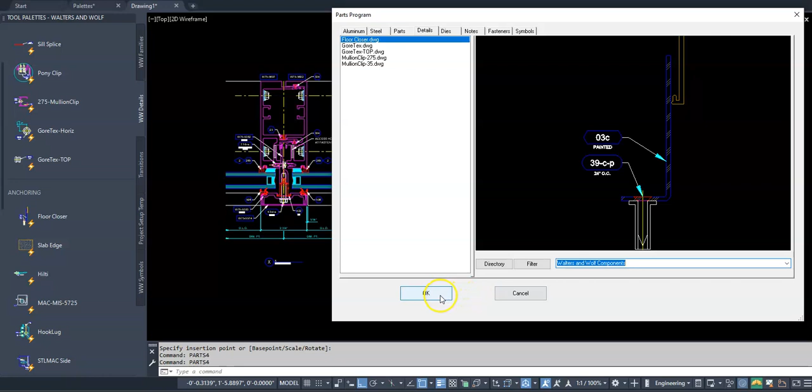I'm going to hit OK. So the insertion point for this floor closer is the bottom corner of the closer itself, so that you could place it on your floor slab in your detail. I'm just going to delete that because you don't need it.

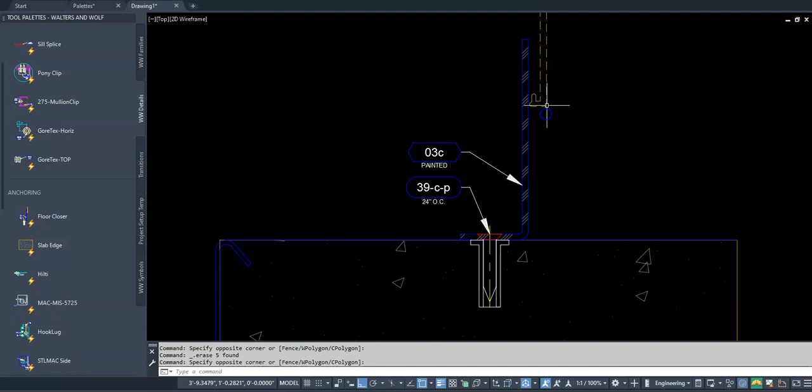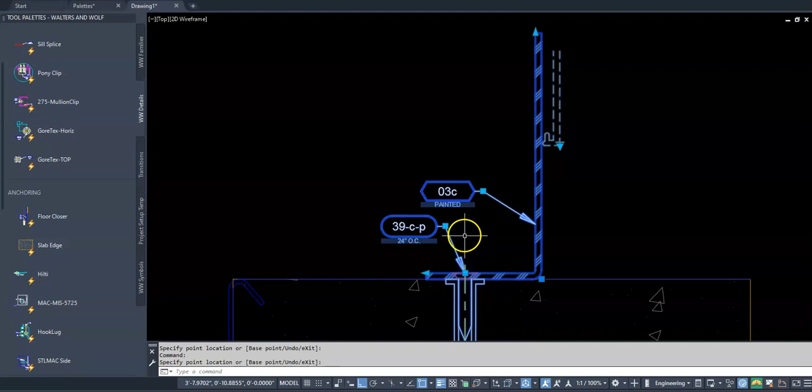I did add this little hidden SRT trim in the back, so you can use that once you place it, to place this closer in relation to your SRT. I have these stretch features, so you can stretch this up and down and left to right. You can move this fastener and the note goes with it, and you can stretch the notes as needed. If you don't like this SRT, you could turn that off - that was just for your reference if you needed it. So that's the first one, the floor closer. It's there for your use.

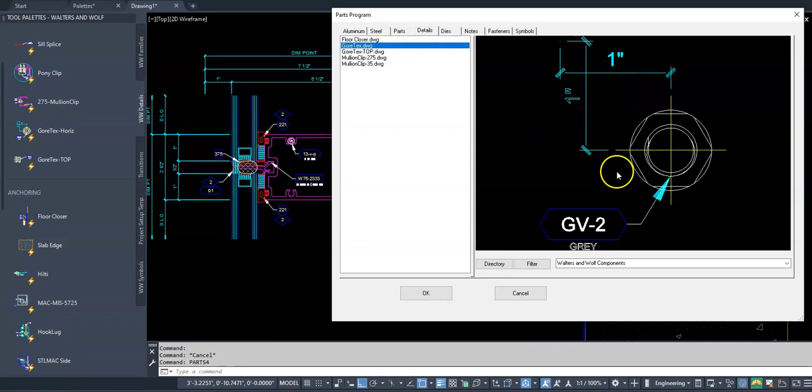The next one, let's go back to the library. So the Gore-Tex sweep, this is the side view. I'm going to hit OK.

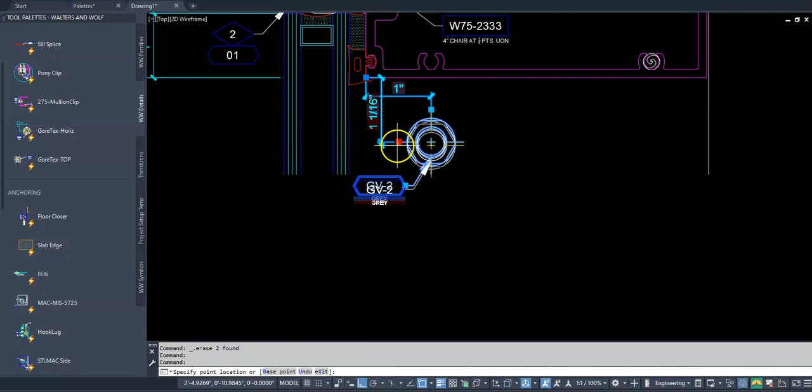The insertion point for that is the back pocket of your horizontal member. So you hit enter and place that. Again, these naturally come in with this detail prompt, so this is our standard location. You can remove that - the 1 inch away and 1 inch down. But again, all of this is movable, so you can stretch this down to whatever you need if you have a job specific, or you can move it left to right. So that's the features of that.

And again, if it's not exactly what you need, you could always explode these. Okay, so that's the horizontal. I created a vertical as well.

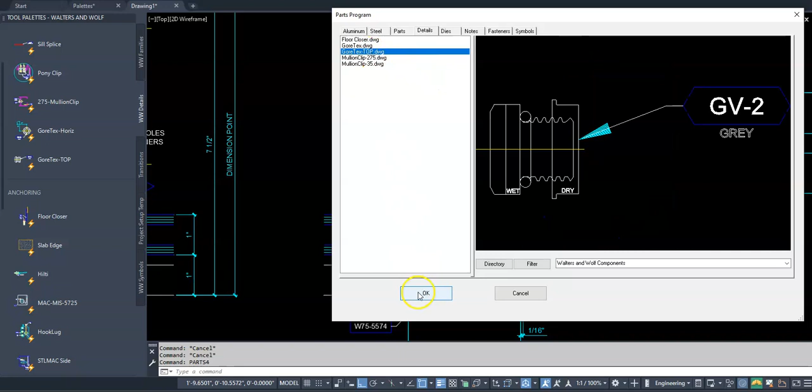So let's go back, and we're calling this view the top view. I'm just going to hit OK. The insertion point for this is also the back of pocket corner, and again, it'll be 1 inch away from the front by default. Again, these notes are able to be moved and flipped. Let me get rid of this fastener.

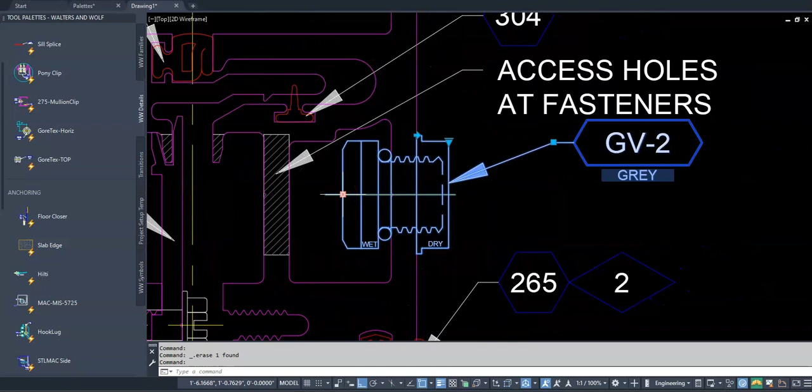We have the wet and dry text. You have the ability to move this nut or fastener over as much as you need if your web thickness of your mullion changes. You have the visibility to turn the ref note on or off, just so you don't duplicate it when you flip it to the other side. And you have this option to flip it.

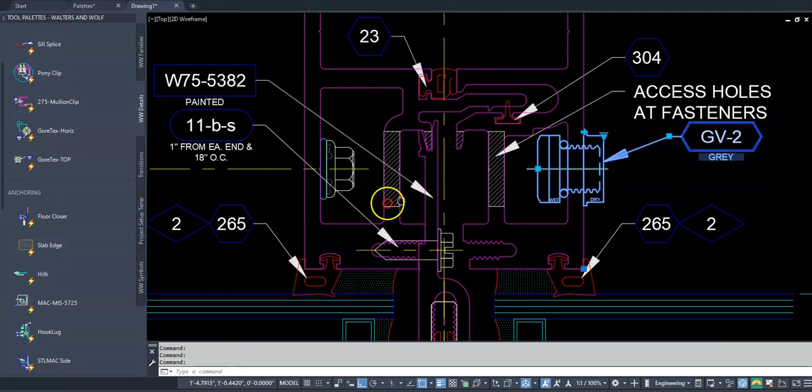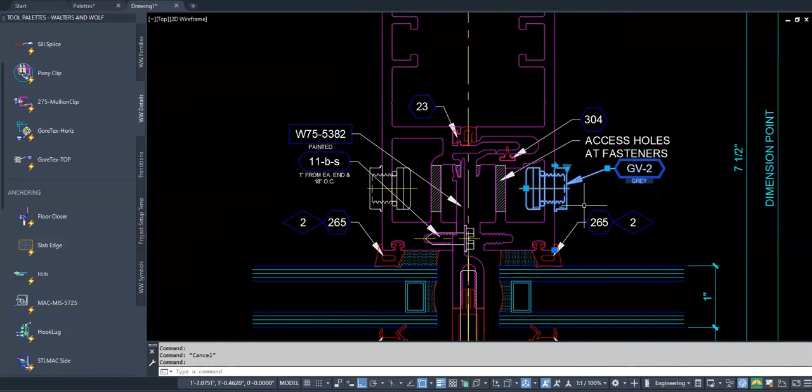So to get it on this side, my suggestion would be to copy the block over first from pocket to pocket, then do the flip, and then turn off your ref note. That would be the best way to do it. So that would be my suggestion there. But now you would have the Gore-Tex, and again, if you need to move it, you can still move it up and down, left to right if you need to.

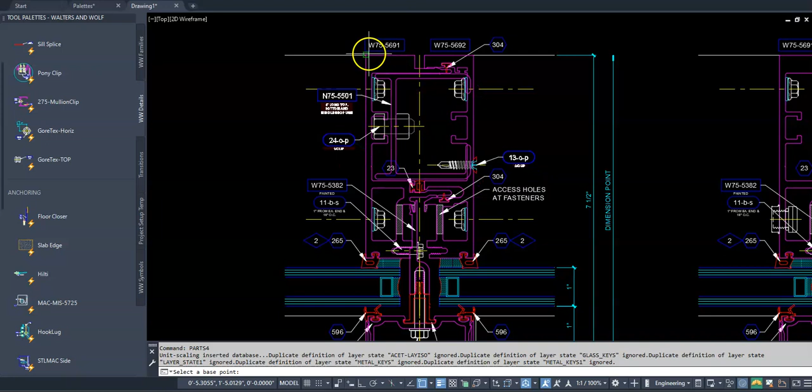And then the last ones are the mullion clips, I call them. So we have a mullion clip for 2 3/4, and then the mullion clip for 3 1/2. The insertion point for these is the back corner of the vert, so you just click and place, and this comes in.

And for this one, you have the flip feature, so that's kind of nice there. And then all these notes - oops, uh-oh, my flip is broken. There we go. And then all of these notes can be moved and adjusted as needed.

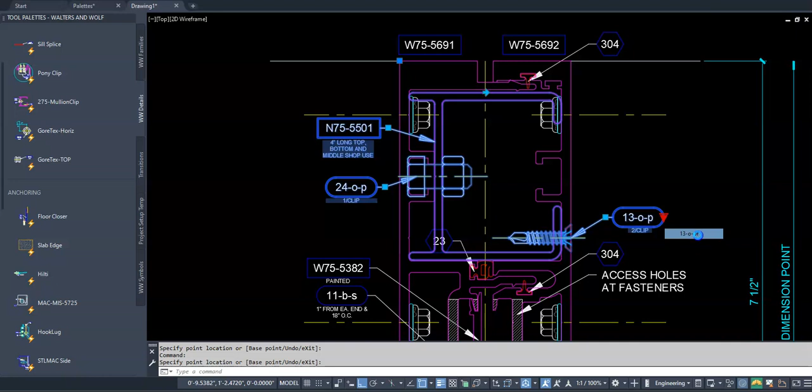And then this one has one extra visibility - if you need to change this to painted, it'll change the text for you. Again, my suggestion is once you place it and get it where you need it, go ahead and explode the block, so that these parts will show up in your general notes, at least in one detail that it's used on.

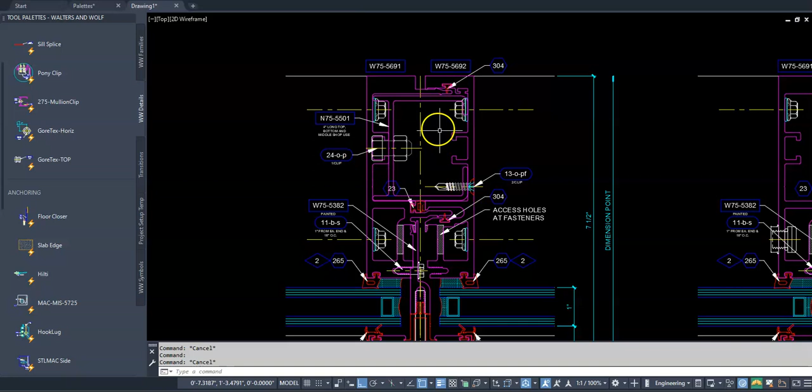Right now, the general notes program won't read the part numbers and fasteners and so forth that are within a block. So once you get it where you need it, at least your very first detail, you can go ahead and explode it, and then the notes will be legible.

That is it that I have created thus far. I hope to create some more.

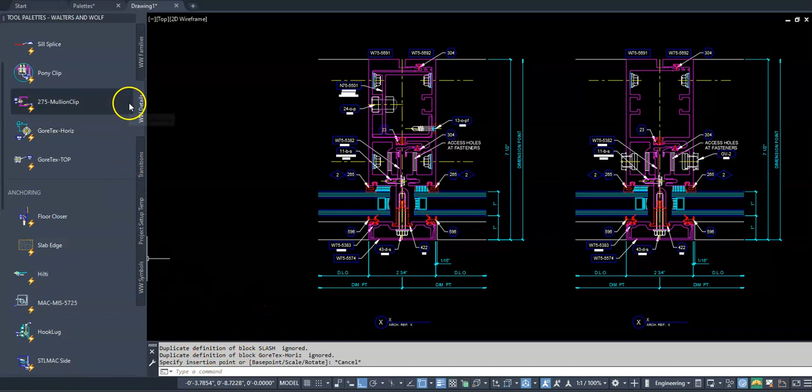Just a little tip - if you have favorites or ones you use all the time, instead of going to the parts library, you can just make a little palette and have it readily available here, where you can grab what you need and drag and drop it without going through the Parts Library dialog box. So you can make your favorites or things you'd need for your particular job. That's just another little suggestion - if you like using these blocks, you can go ahead and use palettes.